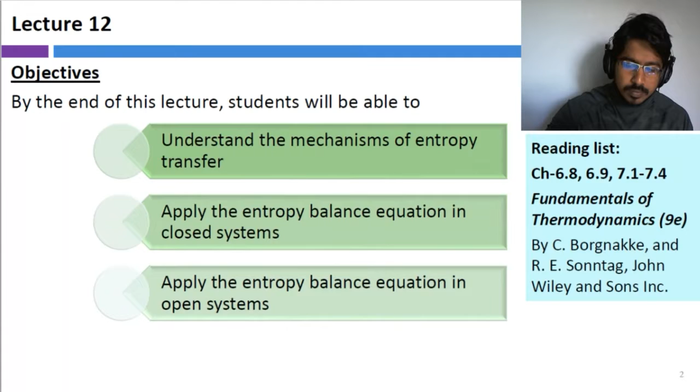This equation we are already familiar with because we discussed this a bit in the previous lecture. Entropy balance is comprised of entropy coming into the system, minus the entropy going out of the system, plus the entropy generation inside the system.

For entropy to come into the system, there are two mechanisms: either it can come with heat or with mass. If it is an open system, entropy can enter the system with the entering mass. But if it is a closed system, we don't have mass flowing in or out, so the mass component does not need to be considered in closed systems.

Similarly, entropy can leave the system with heat or mass leaving the system. In addition, due to irreversibilities, entropy can be generated inside the system. When we have irreversibilities, entropy generation or Sgen is greater than 0. When we don't have irreversibilities, Sgen is 0. For a reversible process, in a nutshell, there's no Sgen — Sgen goes to 0.

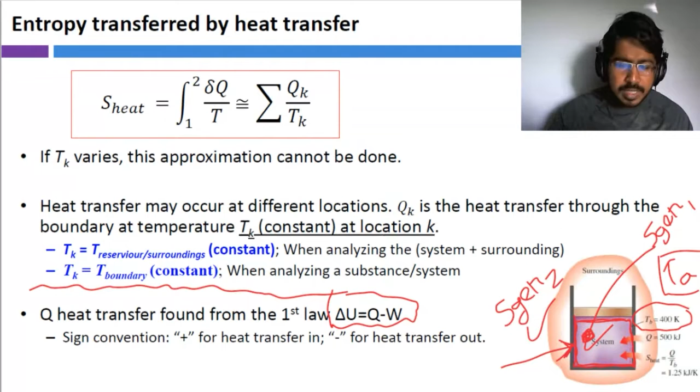Now, you remember we learned the entropy generation equation for a closed system yesterday as well. So total entropy change of a system is equal to entropy transferred by heat coming in and going out of the system, and also entropy generation. And this one is a simplification of the integral that you saw earlier.

And if we want to solve questions, we cannot solely solve everything based on this equation. We might need to combine this with the first law principles, thermodynamic tables, or ideal gas assumptions as necessary. So is there anything that is not clear up to this point? This is kind of a summary of what we did yesterday. Are we good to move to the next slide? Are we clear on this one?

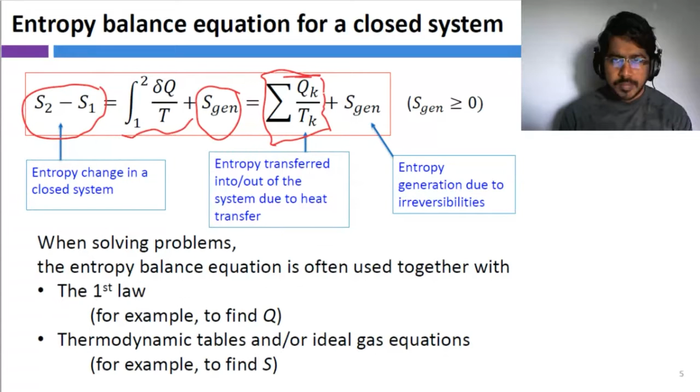Perfect. Let's move on. So this slide is also from yesterday.

So for solids, we can use C times natural log of T2 over T1 to find the entropy change of a solid or a liquid. You know that for solids or liquids, CV and CP equal C, one value, right? For solids and liquids, this relationship cannot be written this way for gases or vapors.

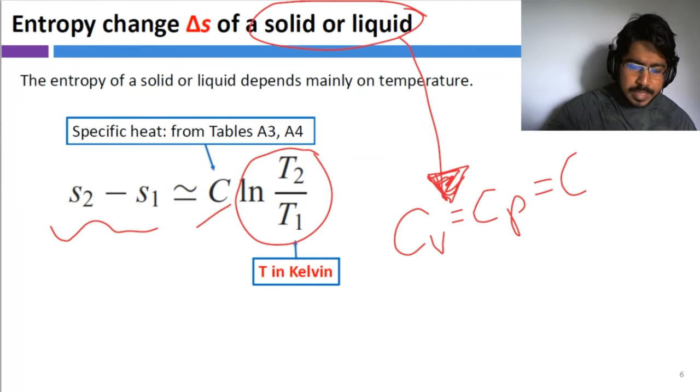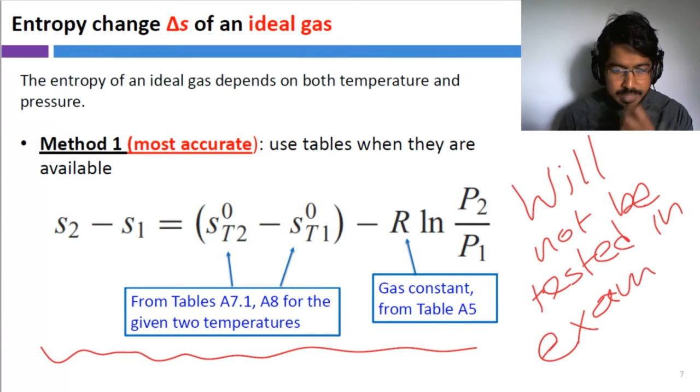And then, you remember we learned there's method one that we can use to calculate the entropy change of an ideal gas. But this method one will not be tested in the exam. So this is just for your knowledge.

So entropy change in a non-ideal situation always goes with the tables, right? If you want to find S2 and S1, it's similar to the previous cases. When we don't have ideal gas behavior, we look into the tables. That's our only resort.

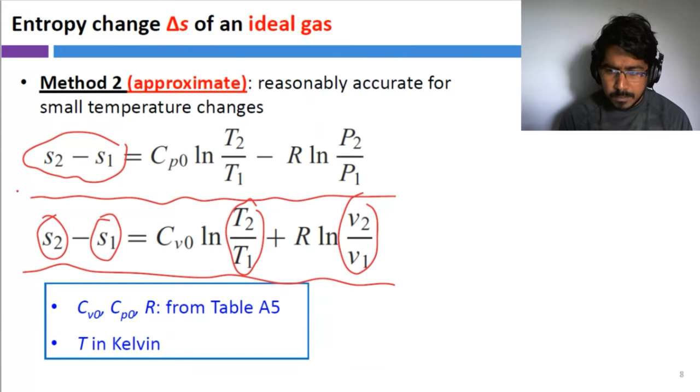Okay. Awesome. So now it's time to get our hands dirty and do some real work. So work on this one. Take 5 minutes, try to solve this question.

When you are trying to solve this question, please note that the surface temperature and outside air temperature are given, right? So how much entropy is generated in the chip? Think about the concept we discussed. What temperature to use when you want to calculate the entropy generated in the chip, and how much is generated outside the chip? Then think of what temperature has to be used. What is the total entropy generation? Think of what temperature has to be used, right?

So in these kinds of questions, you may see some unnecessary details. Maybe not all the details are necessary. So be careful, don't just plug in the numbers like crazy, because I have seen that in some answer scripts. You write a long answer, but we could not find a place to give you a mark because you were just plugging in numbers without thinking too much. So don't repeat that mistake in the coming quizzes or finals. Stop when you read the question and think about the situation. Think of the problem, use your thermodynamics knowledge, and then plug in the numbers. Okay, take 5 minutes to attempt this one.

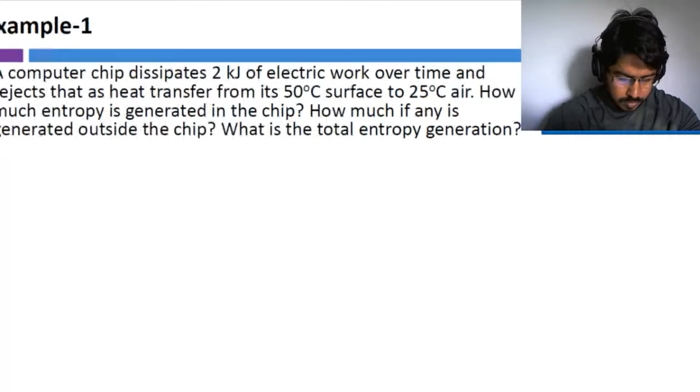Okay, so let's start discussing this question. This question discusses a computer chip which dissipates 2 kilojoules of electric work over time. When we look at this as a closed system, because the mass of the chip is not going to change, we can apply the first law equation for a closed system. So delta U equals Q minus W, right? In this case, there's no internal energy change.

We have to assume steady state operation, because otherwise, if the chip keeps heating, it's going to burn itself. Therefore, we can assume the temperature is not changing, so delta U is 0. With that, we can say Q equals W. Therefore, the W value is given here, so we can bring that up: 2 kilojoules.

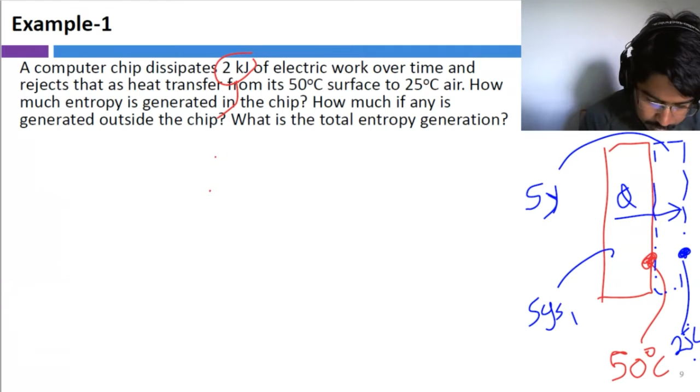Q over... we'll start with this one. Now that we have found the temperature and the heat, I'll erase this so I have more space to start with. Okay, now let's start from here. For system 1, delta S is equal to the integral of delta Q over temperature, plus S generation.

For steady state conditions, what can you say about delta S? Any idea? If we assume steady state assumptions, what can you say about delta S? Excellent, because entropy is a state property. If the system is in steady state, then this is going to be zero under steady state assumptions.

So with that, we can say that 0 equals... and with this, if we want to find the entropy change in the chip, what temperature should we use? 50 Celsius, 25 Celsius? What should we use? We are interested in system 1, which is the chip. So what temperature should we consider? Anybody?

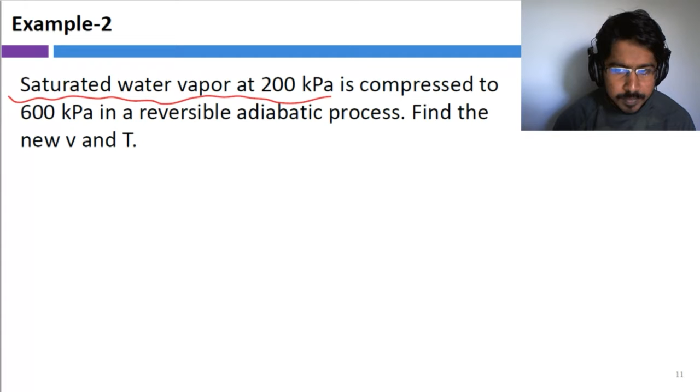This says saturated water vapor at 200 kilopascal. So does it contain enough information to find the properties at this point? Saturated water vapor at 200 kilopascals. Can we find the required information using this one? The state properties, the entropy, enthalpy, and everything? Anybody? We can, right? Saturated water vapor.

So basically, what it says is, if you look at this one, let's say PV or something, and then if we mark the dome, what it says is our state is this one, right? So then we can get the VG values, UG values, SG values, HG values, and everything as our state properties, right? So we have enough information to define our state one. Yes, it is on the vapor, saturated vapor line. Therefore, we have all the information required to define state one. State one, let's say it's done, right? We can find anything we want.

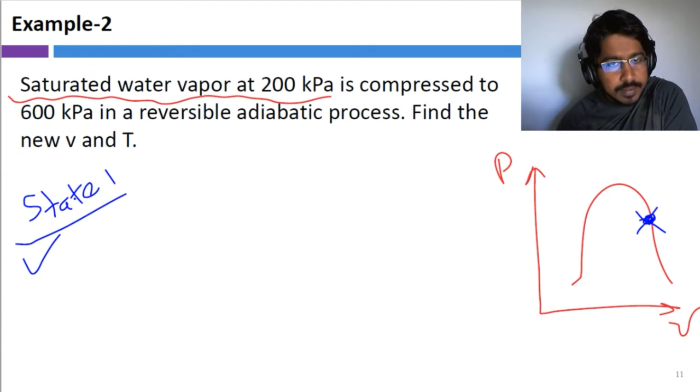And now it says that it is compressed to 600 kilopascals. This is at 200 kilopascals, and state 2 is at 600 kilopascals. Okay, and it says reversible. What does that say? When we see the word reversible, what does that mean to us from a quantifiable parameter point of view? Does it make anything different? Does it make something zero?

Perfect. Sgen is zero, right? Because Sgen is a representation of the irreversibility, and if there's no irreversibilities, then Sgen is equal to zero. In this process, there's no entropy generation. So basically, what does that mean?

Okay, let me stay there for a bit. And then it says adiabatic. What does that mean? Adiabatic? Anyone?

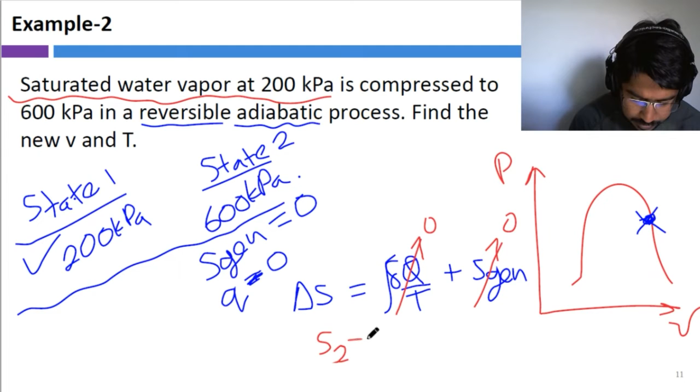So now from this one, we can say that S2 minus S1 equals 0, or in other words, S2 equals S1. Is that all good? Do we all agree up to this point?

Awesome. So now we agreed that we can find all the properties related to state 1, right? We have the pressure at state 2, and also it seems entropy at state 2 is same as S1. Therefore, we have entropy at state 2 as well. So to define state 2, we have the entropy and the pressure. So does that mean we can find the specific volume and temperature at that given state 2? Do we have enough information to find those?

Perfect. We have enough information. You remember we had similar instances, right? When we knew the enthalpy, then with the pressure or temperature, then we were able to find the required information, right? So let's move into the solution now.

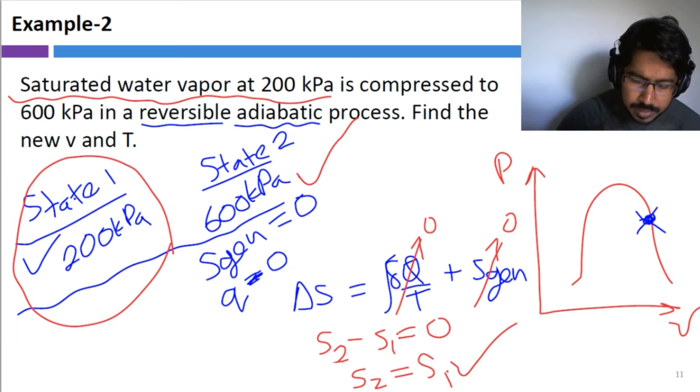So it just discusses the assumptions first, adiabatic and reversible. So therefore, this have become 0, and from the entropy change equation, entropy balance equation, we say that the entropy is constant, which essentially means S1 is equal to S2, and as state 1 is on the saturated vapor line, as we discussed earlier, here we can find all the properties by looking at the two-phase tables.

We go to two-phase table, and as this is water, we have pressure and temperature entry both, and it's easy to pick pressure entry in this case. So we go to 200 kilopascals, and we record specific volume, internal energy, specific volume, entropy, and temperature. We can record everything. We can also find internal energy, enthalpy if needed. Okay, and after that, we know that at state 2, again, the entropy is going to be the same number. So S1 is 7.12. So we can go to property table. Let's do it together.

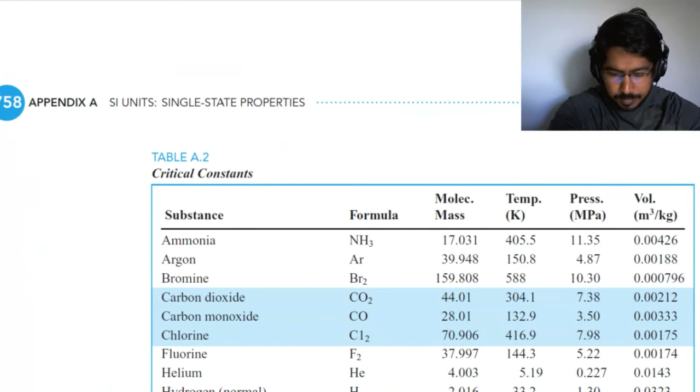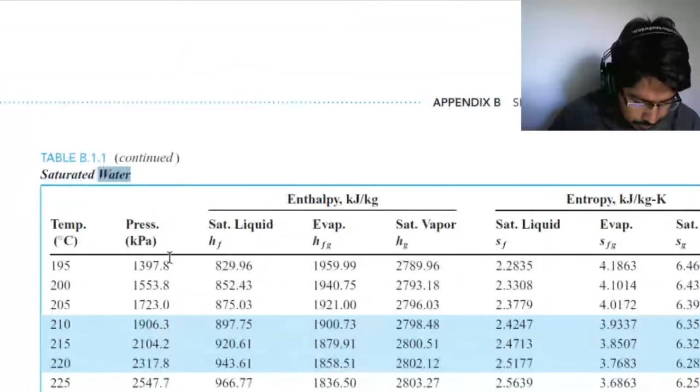So let's go to two-phase tables, saturated water, and we'll go to pressure entry. Our interested pressure at state 2 is 600 kilopascals. This table does not have the entropy, so we have to go further down to the table that has entropy and 600, and our entropy columns are the last three, so we can check our entropy value.

Entropy value is 7.1271. If you go there, you can see for 600 kilopascals we don't have 7.12 - it is higher than our SG value for 600 kilopascals. Therefore what does that mean? Our entropy value is higher than SG value, so we are in the superheated region. Therefore we have to go to superheated tables and find the relevant entropy value.

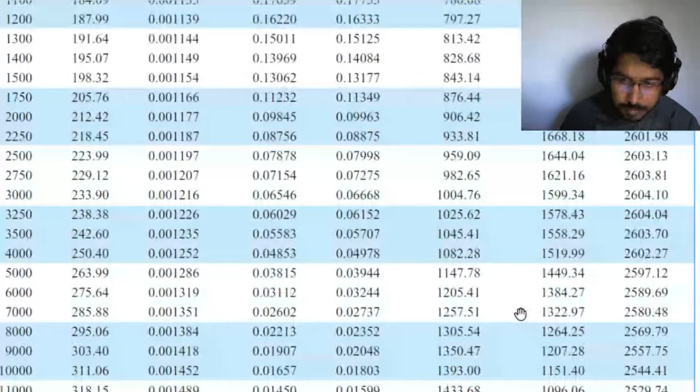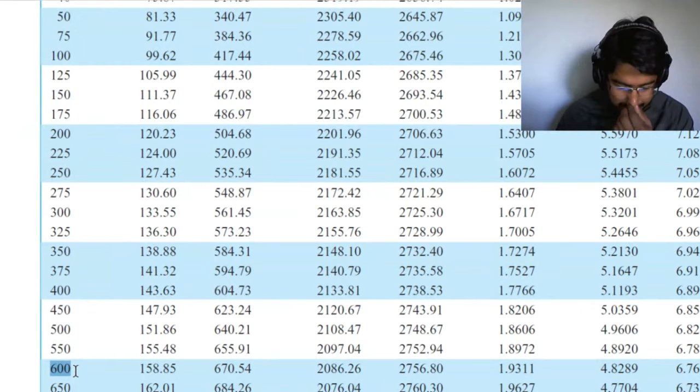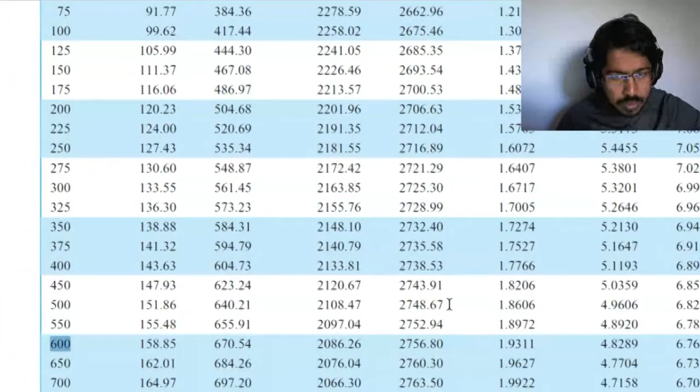So at state 2, we know the pressure and entropy. We are clear up to that point. We take this number to our property table, go for the pressure entry table as it's convenient, and locate 600 kilopascal. The last three columns of this table are SF, SFG, and SG, and our entropy value is 7.1, which is higher than SG value. So that means we have to look into the superheated tables to find our entropy value under this given pressure, because it's out of our region.

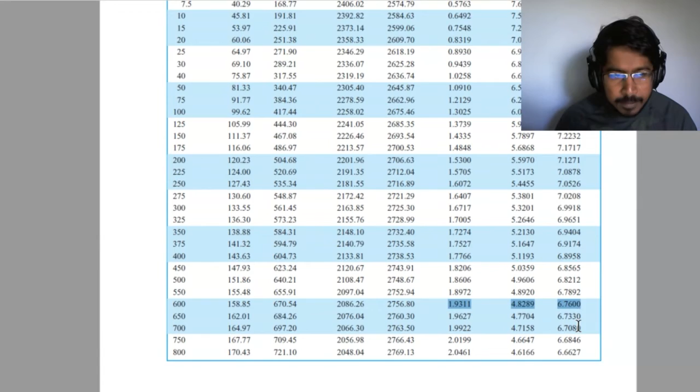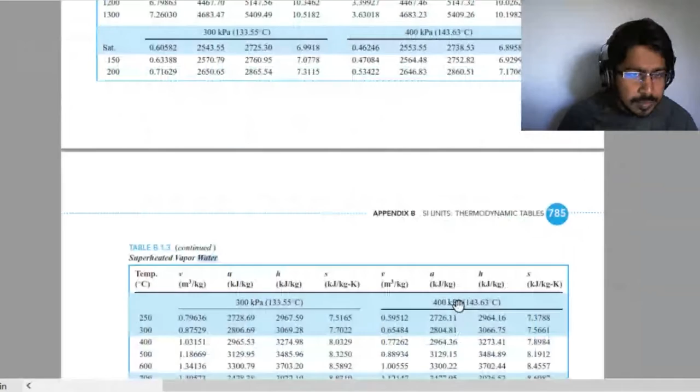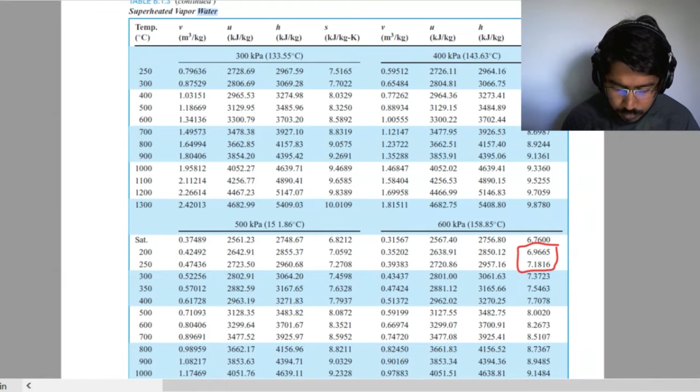Okay, so now we go to superheated water tables, and now we have to locate our pressure: 300, 400, 600. In this 600 table, entropy is the last column, and our required value - let me check the number - is 7.12, so 7.12 should be in between 6.9 and 7.18. So our interested entropy value is within this bracket. Therefore we can do interpolation to find the required properties, specific volume and temperature. That is what is being done here.

Are we all clear? Or any questions so far? Anybody having doubts, questions, needing more clarifications? Perfect. So now let's look into the next question. Take a few minutes and try to solve this one.

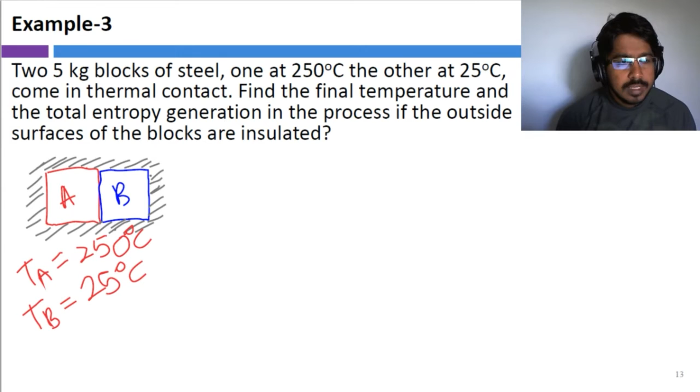So in this question, it says there are two 5 kilogram blocks of steel, one at 250 Celsius, the other one at 25 Celsius. So this is, let's say, TA equals 250 Celsius and TB equals 25 Celsius. And then it says they came into thermal contact. What can you say happens if they were in thermal contact?

A high temperature block and a low temperature block, then what would happen? What would happen to the temperature of the two blocks? Would it come to a common temperature after a while, somewhere in between 25 and 250, or would it increase or decrease totally? What would happen? Any suggestions?

It will come to a common T, and it will be in between 25 and 250 Celsius. Excellent, Lisa. So now, then find the temperature and the total entropy generation in the process if the outside surfaces of the blocks are insulated. Right now, it says outside these blocks, there's no heat transfer. That is what we mean by insulated.

So if we want to find the final temperature, we can try with the first law for a closed system. If we think of this as our system boundary, A plus B, the total block, we can write the first law equation: delta U equals Q minus W. What can you say about Q?

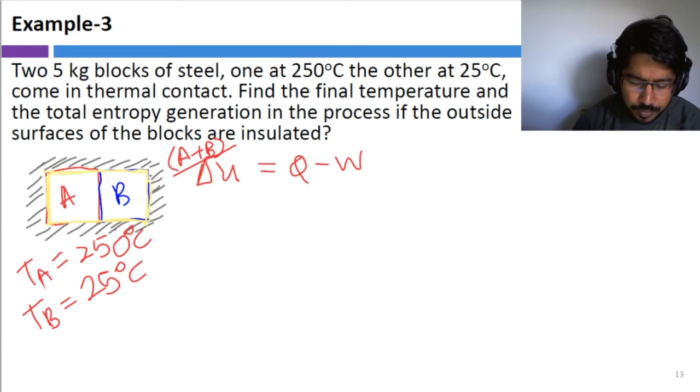What can you say about Q? Is it 0 or does it have a value? We are applying the first law equation to A plus B. Anybody? Is Q 0 or does it have another value? It's going to be 0 because it says well insulated. So it's going to be 0. And what can you say about W? Is it 0 or does it have a value?

No, it does not, because we have to think from the first basics, right? So does it have a boundary work? Does it have electricity or something coming in or going out? No, nothing. So there's no work. That's why we say W is equal to 0.

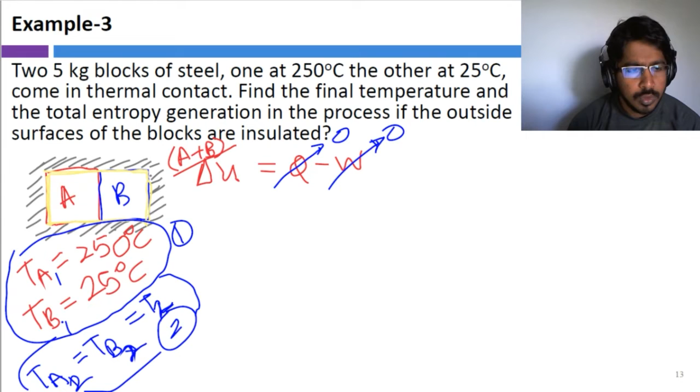And now it leaves us that the internal energy of the system does not change. The total internal energy of the system does not change from state 1 to the final state. At the final conditions, both blocks come to, let's say TA2, TB2... equals T2, the common temperature that we were discussing at the beginning of the question. So now both blocks should be at the same temperature at the end of the process, right?

So if we apply, we know that the internal energy change of a solid can be written as delta U equals mCV delta T. CV or C doesn't matter because this is a solid. Therefore, for solids, CV equals CP equals C.

So doesn't matter if you put CV or not. So you can find delta UA using delta TA, and this is for block A. You can also do the same thing for block B and say mCV delta TB. Now the total is going to be equal to delta UA plus delta UB, which equals 0.

Do we make sense here? Or anything not clear up to this step? This should be MA. Anything that is not clear, or is everybody getting it perfectly fine?

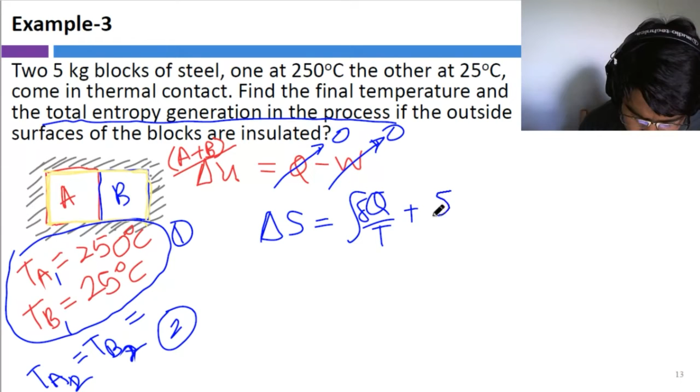So we can write the entropy equation: delta S equals the integral of delta Q over T plus S gen. We know that this term is 0 because there's no heat transfer with the outside environment, since it's well insulated.

Therefore, we can find S gen by delta SA plus delta SB equals S gen, which means... to find this, since it's a solid, we can find delta S using MC log of T2 over T1, the temperature ratio. So you can find delta SA and delta SB using this equation.

Okay, anything not clear so far? Anything not clear so far?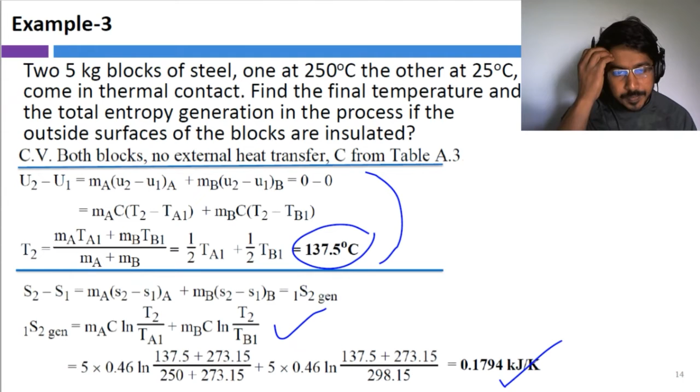So now let's look at the solution. This portion discusses the internal energy balance that we discussed. So from that, from the first law, they found the final temperature, and then from this equation, as we discussed earlier, for considering the entropy change of block A and block B, they have found the total entropy generation during the process.

Okay, and it's important to note that we did not use here, we did not try to do something like sigma delta Q over T as a simplification. It's anyway like there's no heat transfer with the surroundings. But even if the surroundings had heat transfer, the temperatures of the blocks are changing and everything is changing. But if and only if the temperature here is constant, we can use it, right?

If we wanted to find the total entropy generation within the system, could we have used this relationship, this simplification? If we wanted to find the internal entropy generation, then we'll have to pick this blue color boundary, as I am just drawing now.

But the temperature of this boundary is constantly changing because the blocks are changing temperatures, right? Therefore, for internal conditions, we could not have used this relationship that we see here.

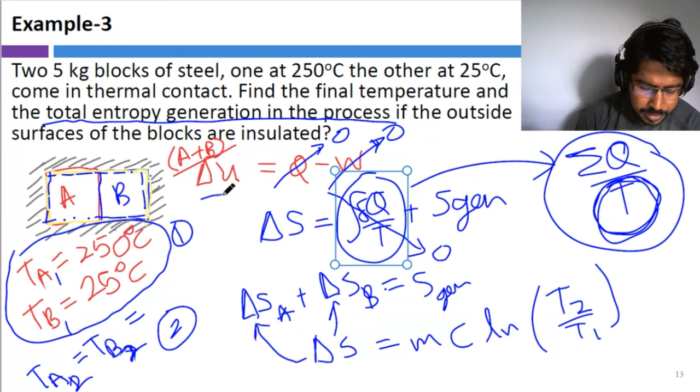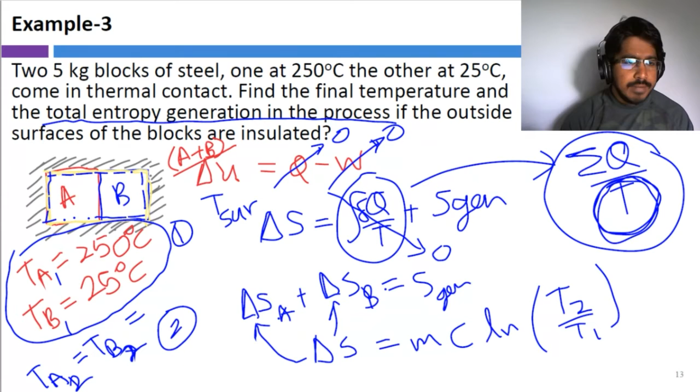But if the atmospheric temperature, T surrounding, sorry, TA is confusing, let's say T surrounding was given to be a constant value, can we use this simplification, the very same simplification, to find total entropy generation? Can we do that? Not total entropy generation, but to find the entropy change due to heat transfer, can we do that? Anybody?

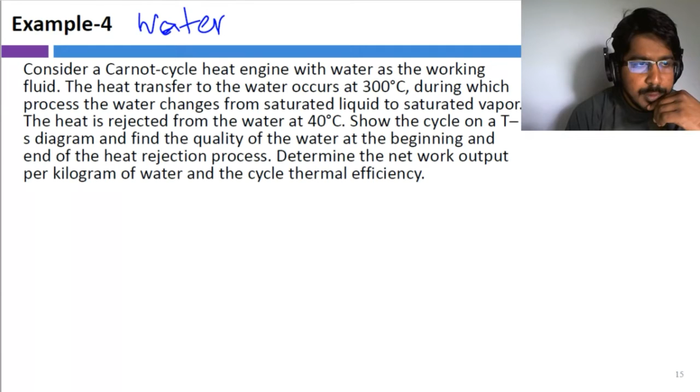Heat transfer to the water occurs at 300 Celsius, so this is 300 plus 273 Kelvin - this is our high temperature reservoir. Then we have our heat engine, it absorbs heat QH, and then it rejects heat from the water at 40 Celsius, which is 40 plus 273 Kelvin - that is QL. While doing so we deliver some work out. And here's an important notion: during the heat transfer process, the water changes from saturated liquid to saturated vapor - this is very important.

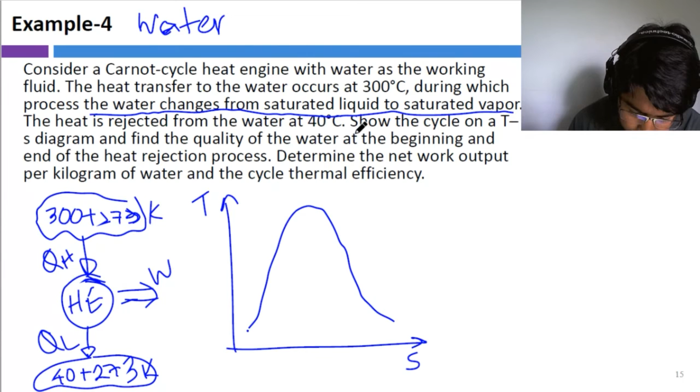So we were asked to draw this cycle on a T-S diagram. Similar to previous cases, we have the dome, and the heat transfer process happens from saturated liquid to saturated vapor. The temperature is 300 Celsius - let's call this state 1 and this state 2. From the Carnot heat cycle we know the heat addition is isothermal, so the temperature is constant, and it starts at saturated liquid and heats the substance until we reach saturated vapor. Are we clear up to this point?

Now it says heat is rejected from the water at 40 Celsius, so heat rejection happens at 40 Celsius. I won't mention Celsius all the time since it's confusing, instead I'll put it at the top - 40. The second process after heat addition is expansion through the turbine, the work output phase. Any process involved in this discussion is reversible, and a reversible work transfer has no entropy change.

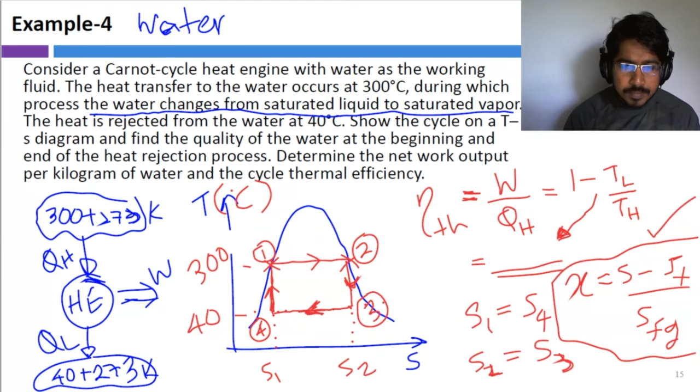Okay, now let's go into the solution. So as we discussed earlier, x3 and x4 can be found, and then the thermal efficiency.

So for Carnot engines, S1 equals S2? No, S1 and S2 are different because these two are here, 1 and 2. Entropy generation is always 0. S1 and S4 are equal, yeah. And for any process in the Carnot engine, entropy generation is 0 because all the processes are reversible.

And now we are clear up to finding x3 and x4, right? Anybody having trouble with that? Or can we all find the quality? Anybody who's clear about finding the quality? Anybody who has no doubts? Perfect. And are we all clear about finding the Carnot efficiency?

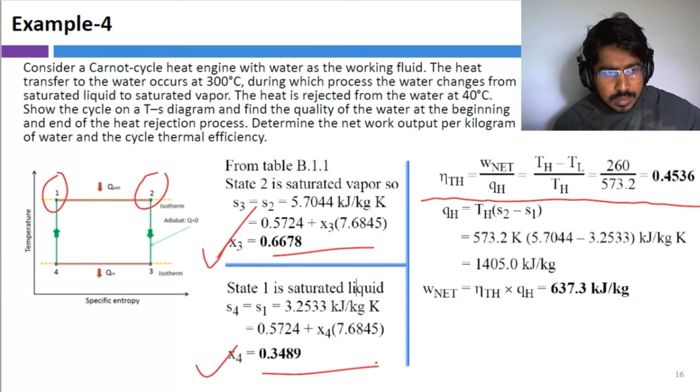Perfect. So to find QH, like from process 1 to 2, let's say delta S equals Q over T plus Sgen. But for a Carnot cycle, we know that for any process, the entropy generation is 0, because all the processes are reversible. And this is an isothermal heat addition, therefore we can say that this is equal to QH over T. From this relationship, we can find the heat addition, the total heat input to the substance. Is that step clear, or any doubts up to this point?

Any challenges with that step? We applied the entropy balancing equation to process 1 to 2.

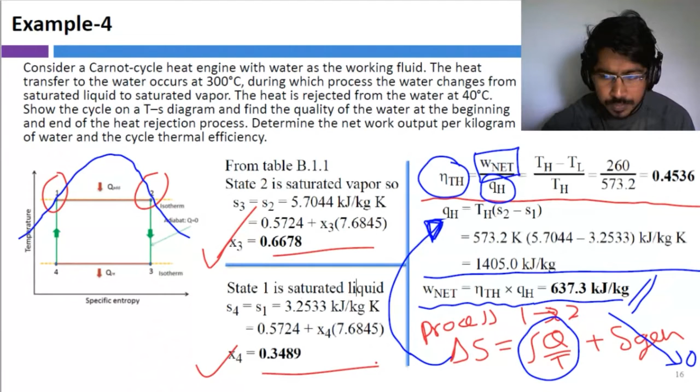Now, take about 2 to 3 minutes to go through this question.

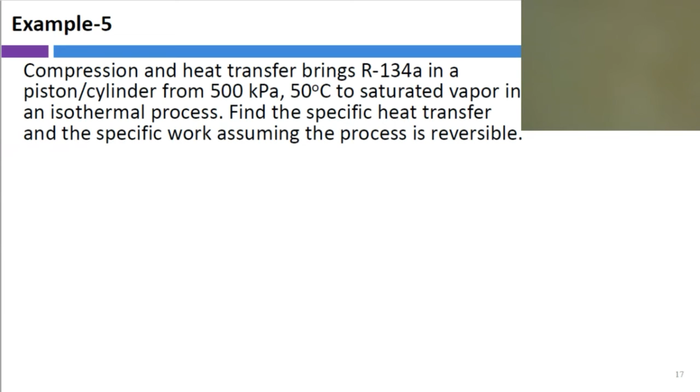Okay, let's go through the solution process together. It says compression and heat transfer brings R134A. So this is the substance we are dealing with, R134A.

I want to emphasize one thing: when you see R134A, never look for ideal gas assumptions, always look for the tables. This mistake was done by you in the midterm, but we did not penalize you for it. We deducted a few marks for using that ideal gas assumption, but still gave marks for the process. That would not happen in the next exam, right? So learn from the mistakes made in the midterm, and don't ever use ideal gas assumptions for R134A. It's a refrigerant, and it doesn't necessarily say that it's a gas.

We don't know whether it's a gas or a liquid or anything, it could be in any state, so don't use that assumption.

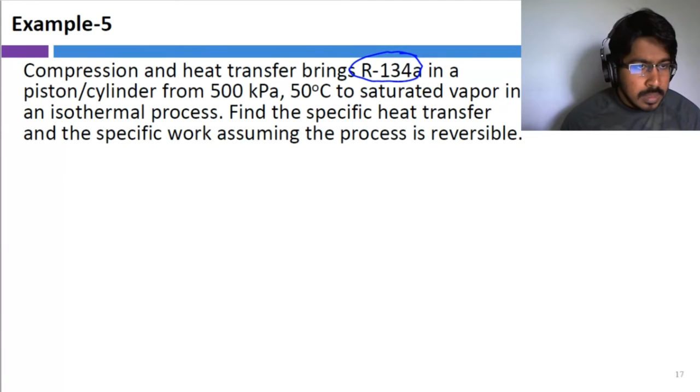So R134A initially was at state 1: 500 kilopascals and 50 Celsius. Then compression and heat transfer brings it to state 2.

It says it becomes a saturated vapor at 50 Celsius, because the process is isothermal. The question says it becomes a saturated vapor following an isothermal process, right? So now saturated vapor at 50 Celsius.

Find the specific heat transfer and the specific work, assuming the process is reversible. Process is reversible, so that means Sgen equals 0.

So we have all the information required to find our entropy values, enthalpy values, internal energy, because both states are clearly defined. If we go to the property tables, we can locate these states and find the required properties, right?

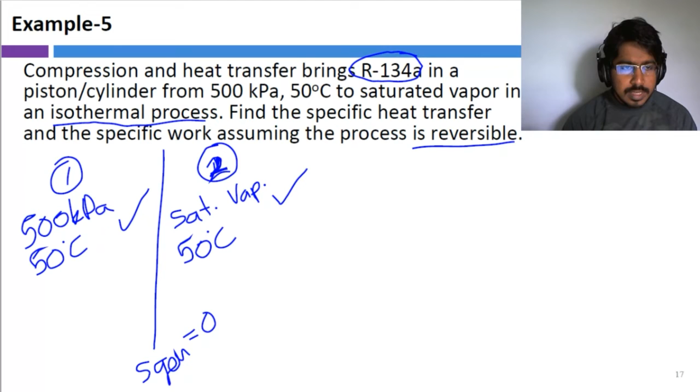The question asks to find the specific heat transfer. If you look at our delta S equation, or entropy balance equation: delta S equals delta Q divided by T plus S gen, right? S gen becomes 0 because...

...the question says it's a reversible process. Therefore, S gen becomes 0. And this is an isothermal process, so we can write this as Q divided by T, right?

So Q is equal to delta S into T. In other words, specific heat is equal to specific entropy change into temperature. So we can write S2 minus S1 into...

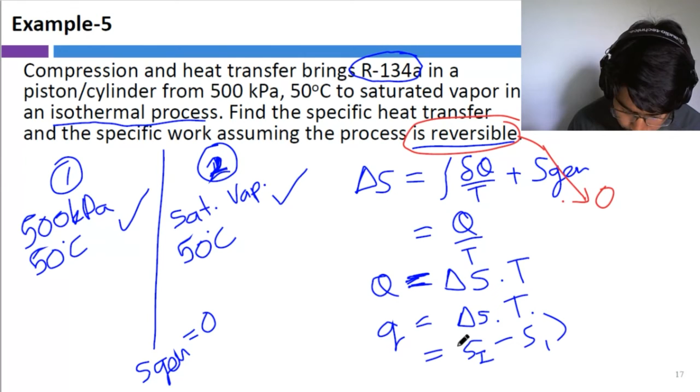...50 plus 273.15, right? So you can find the...

...specific heat from the entropy equation, and then you can find U1 and U2 from property tables, and then you can apply the first law for a closed system: delta U equals Q minus W. So you can find Q from our entropy equation, plug in the numbers for Q from there, and then plug in the numbers for internal energy from there. Therefore, you can find W.

Okay, let's look into the solution process. So we find internal energy and entropy for state 1, and again internal energy and entropy for state 2, and from the entropy balance equation you get here.

So there's no entropy generation, that's why you don't see the SGen component in this equation. From this, you can find the temperature, the heat transfer, the specific heat transfer, and then you plug in those heat transfer numbers and the internal energy values in the final answer to come up with the specific work.

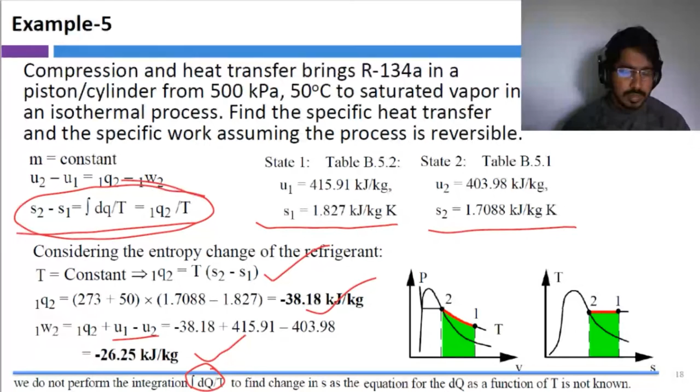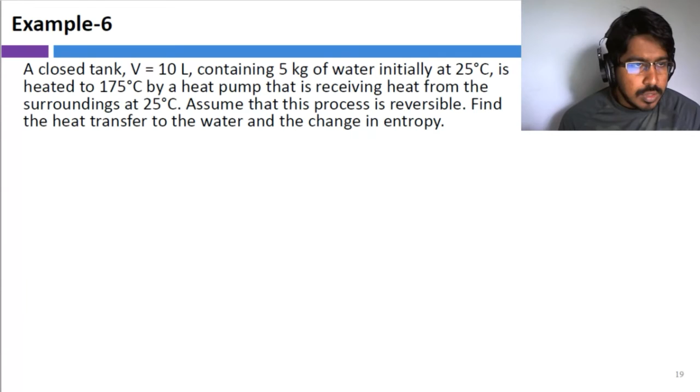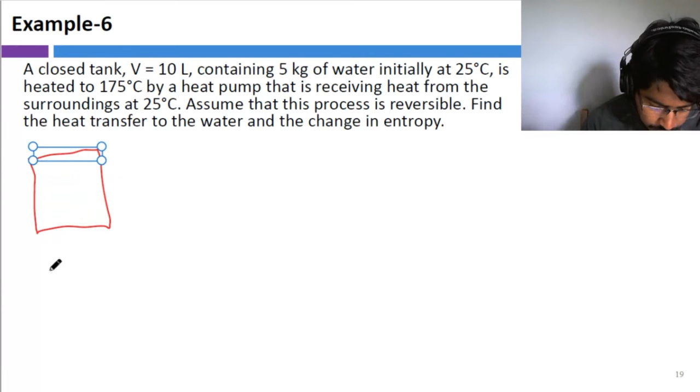Let's go through the solution process together. It's a closed tank. Volume is, let's say at state 1 at the beginning, 10 liters or 0.01 cubic meters. The mass is given to be 5 kilograms. Based on these two, you can find the specific volume of the system. The temperature at the initial condition is 25 Celsius.

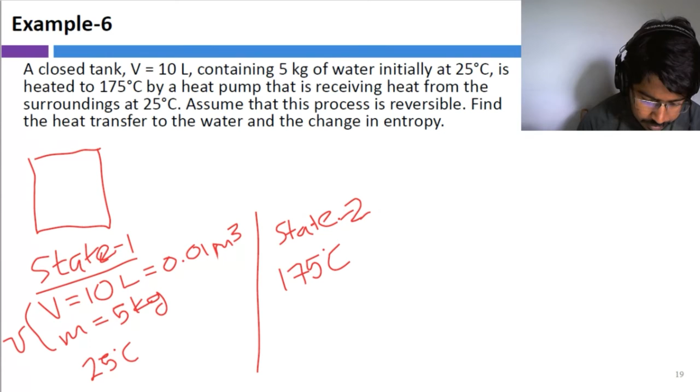Now for state 2, temperature is given as 175 Celsius, and specific volume at state 2 is going to be same as state 1 because the tank is not going to change its volume. Assuming this process is reversible, that means Sgen equals 0. We need to find the heat transfer and change in entropy.

Looking at this tank, what can you say about the amount of work done during the process? Work done on the tank is 0, right? It's tricky because it has a heat pump in the description - don't get misled by this unnecessary information. Whatever it is, it's providing heat to our tank. Therefore, no work done.

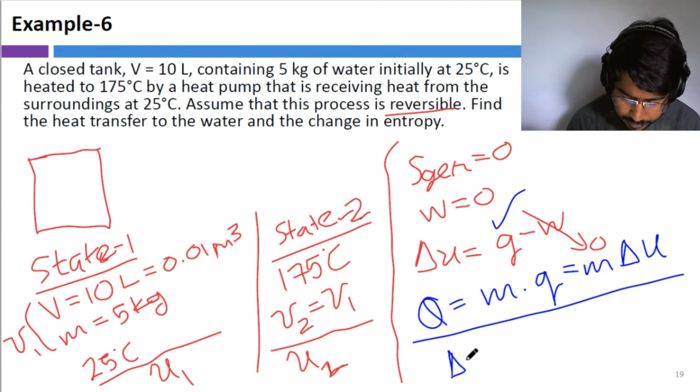With that, you can find internal energy U1 and U2 with the information given about the states. Once you have U1 and U2, use the first law for a closed system: Delta U equals Q minus W. So W is 0, so we can find the heat transfer. From this one, Q equals mass into specific heat, which equals mass into delta U in this instance. From this, you can find the heat, and to find the entropy, delta S equals M into S2 minus S1.

The process is simple as that. If we go to the solution process given here, from the energy equation we can see that this component goes to 0, therefore the heat transfer is equal to the internal energy change. To find that, you have the properties at state 1 - it's a two-phase region, therefore the quality was found already, and U1 and S1 were found from the property tables. Similarly, for state 2 the properties are found here. After finding the properties, it's just a matter of plugging in the numbers. The solution looks longer, but it's just finding properties which you are already comfortable with, from the thermodynamic table.

Any questions, or everything clear? Perfect.

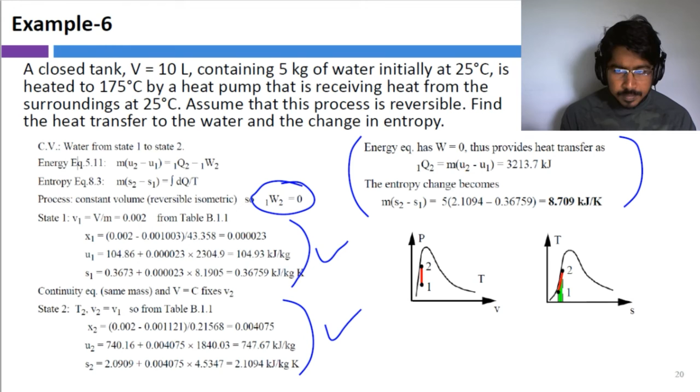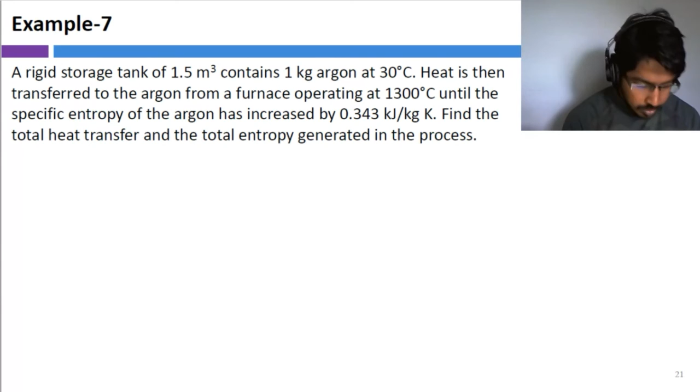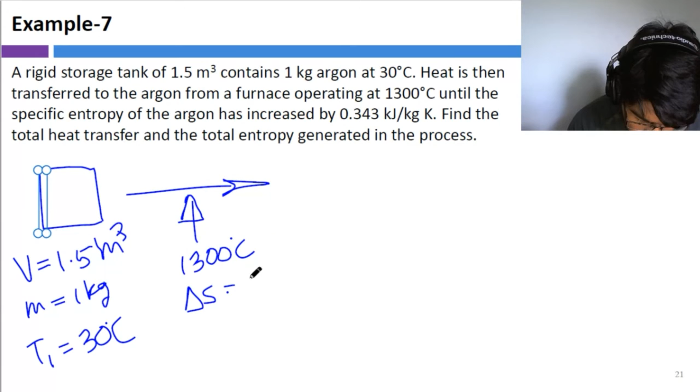There's a rigid tank, 1.5 cubic meters by volume, and the mass is 1 kilogram. V equals 1.5 cubic meters, mass is 1 kilogram. At state 1, T1 equals 30 Celsius. Heat is then transferred to the argon - we heat it from a furnace operating at 1300 Celsius, so that the argon reaches state 2. The entropy change during the process is given to be 0.343 kilojoules per Kelvin kilogram.

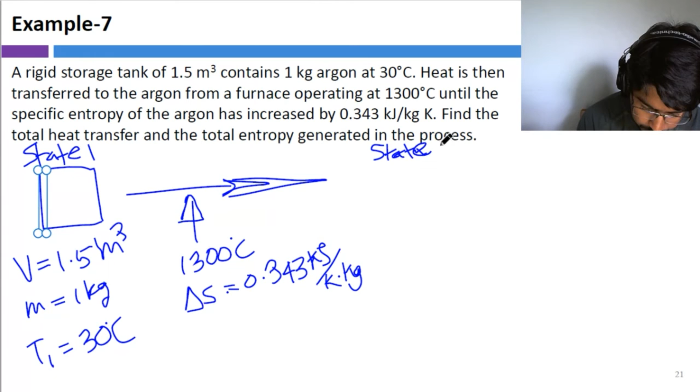So now we have state 1 and state 2, and we need to find the total heat transfer and total entropy generated. To find the total heat transfer, what can we do? We can try the first law. If we use the first law for a closed system, delta U equals Q minus W. What can you say about the magnitude of W? Magnitude of W is equal to 0 because there's no boundary work and no other means of work involved. Are we all in agreement up to that point?

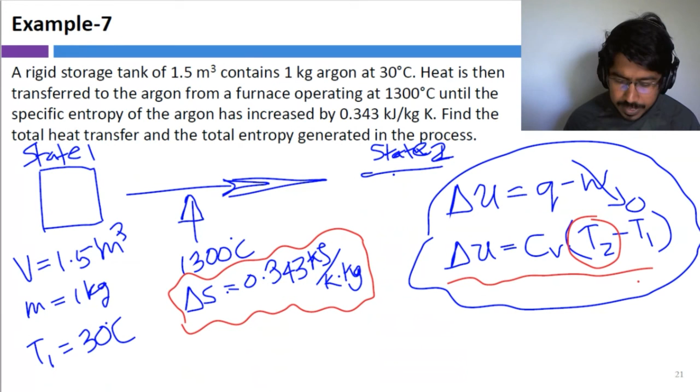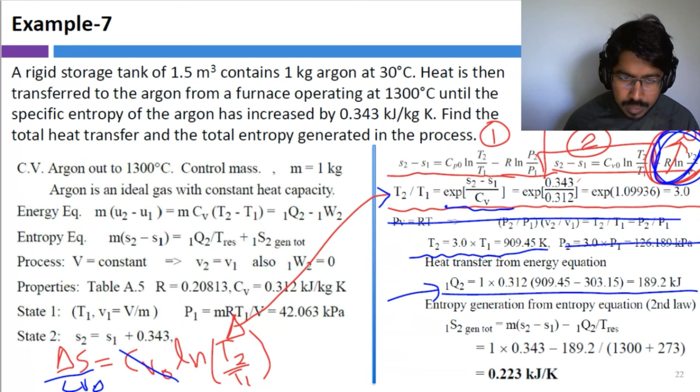So from the first law relationship we developed above, delta U equals Q. Therefore, to find Q, we can find delta U, which equals CV times T2 minus T1. From that we can find Q, and again we can find the total entropy generation using the entropy balance equation as seen here.

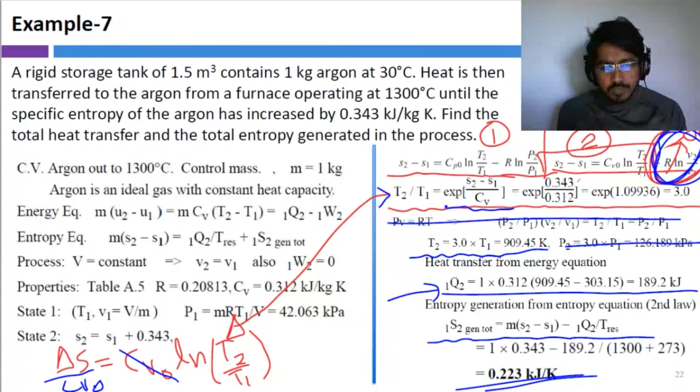Take about one or two minutes and think about the solution, and let me know if you have any issues or anything not clear about how we did this.

Are we all clear, or any doubts? Anything not clear? So what's going on? Any feedback would be nice, because then we know where we all stand, right?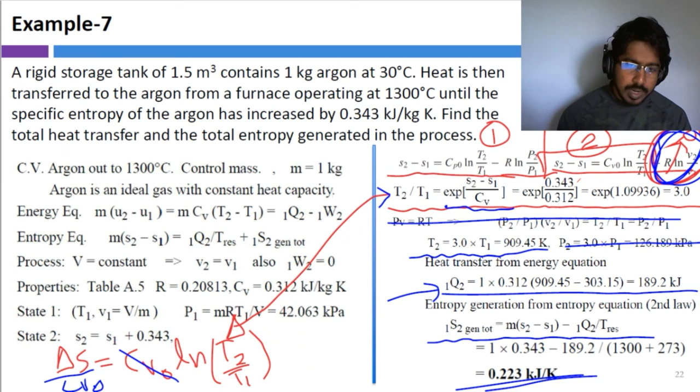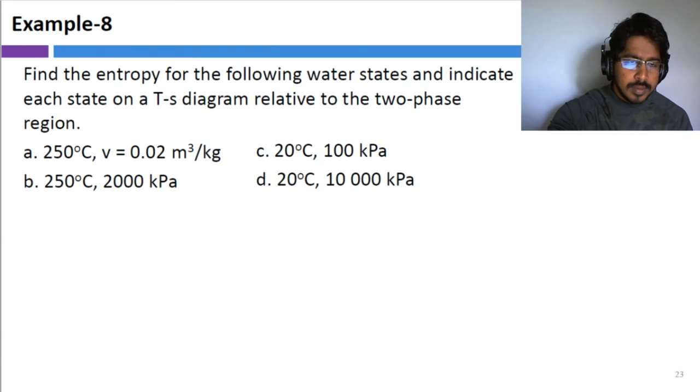Okay, as we are running out of time, I'm going to move forward. This question is pretty straightforward, it's just a matter of locating the entropy and marking the properties on a TS diagram. So I'm allowing you to do it. The solution is here, you can cross-check your work. You can try it at home, okay.

And then we have a small theory component to cover before the end of the lecture today: how to use the entropy balance equation for an open system, right?

This is very important, bear with me. I know that you have been using your brains a lot today, but bear with me until this 5 moments, right? 5 minutes, the last 5 minutes.

So the entropy taken into a system can be calculated with the mass taken in and out of a system: mass into specific entropy. You remember we used a similar approach to find the enthalpy taken into a system, mass into enthalpy, right? Similarly, we can multiply the mass by the specific entropy to find the total entropy taken into the system with the incoming mass, or taken out of the system with the leaving mass.

Are we all clear about this slide? Is it difficult, this part?

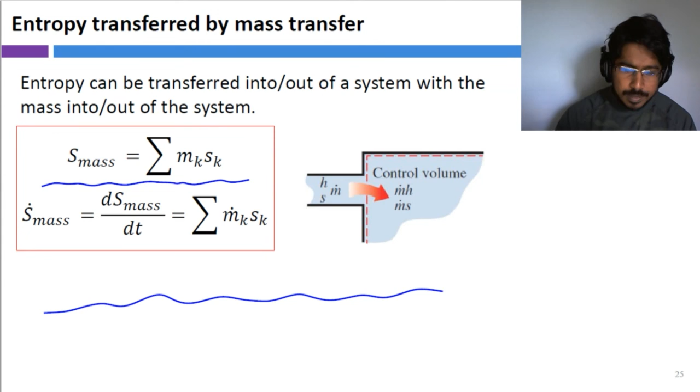Okay, so now, for a steady state, for an open system, we can write the entropy balance equation as the total entropy of the system, entropy change of the system. And then we had the entropy change due to heat transfer, we already had that in closed systems, so we are familiar with that. And entropy generation, again, we are familiar with that.

So the new component that we are going to experience in an open system is this portion, the highlighted portion, right? Entropy taken into the system minus entropy taken out of the system with the incoming and outgoing mass.

So are we clear about this equation? Or is it difficult to comprehend? Are we clear with this one?

So this portion we already had for closed systems, it's still there. And in addition to that, the blue portion we already had for closed systems. And in addition to that, in an open system, what's the difference? There's mass transfer, right? So with the incoming mass, it brings some entropy. With the leaving mass, it takes out some entropy.

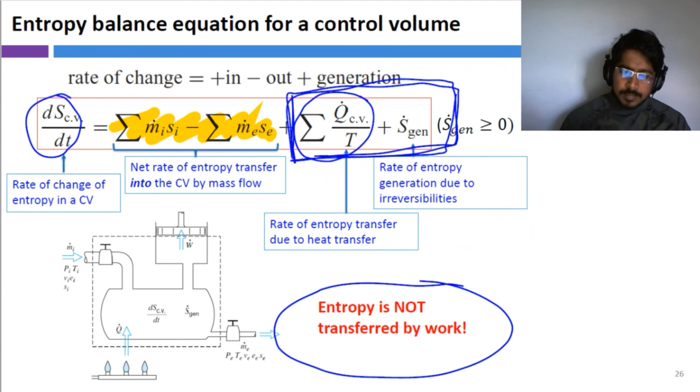Okay, for steady state, the entropy change of a system is going to be 0. So if we go back, this portion becomes 0 for steady state, right?

And for a steady state, when that portion becomes 0, we can reconfigure this equation, the previous equation, to look like this. It's the same equation. I prefer to use the previous equation in my calculations, that's a personal choice. You can decide to go with this one or the previous form, making the change of entropy of the system equal to 0. So it's a choice, and in a steady state system, we agreed that this equation can happen.

And in a reversible adiabatic process, Sgen goes to 0. In an adiabatic process, there's no heat transfer, therefore QCV over T goes to 0. Therefore, in a steady state reversible adiabatic process, the entropy taken into the system is equal to the entropy taken out of the system by the mass, right?

So when we are solving these kind of problems, we can use continuity equation, first law, and thermodynamic tables and whatnot to support our solution process, as we did in the previous example, right?

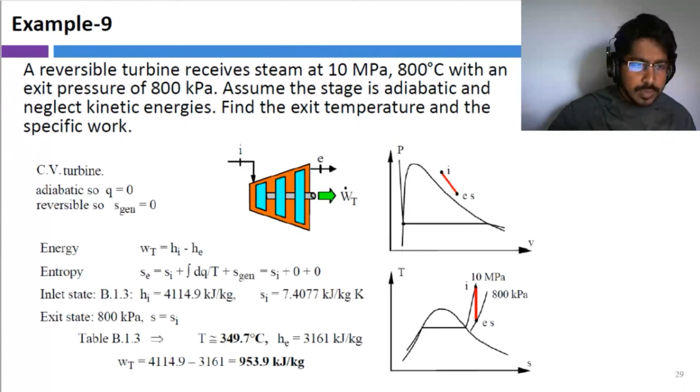What we will be doing in the coming class on this Friday, we will be practicing the open entropy balance equation for open systems, right? So we'll practice ourselves, and there's an example question down here, and the solution is given here as well. I'm not going to go through that today, so you can try it at home, right? And in the next class, we will try more questions on applying entropy balance equation for open systems.